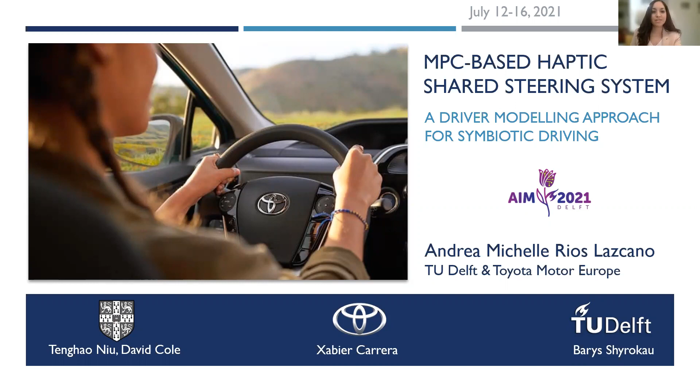We will start with an introduction of the current situation of vehicle control. Afterwards, I will recap the two main pillars of this new assist system, which are driver modeling and model predictive control, combined within the haptic shared control framework. Later, the results of the driving simulator experiments will be presented, and finally, the main conclusions and future steps are outlined.

Let's start with some background regarding the automotive sector. The different projections towards the deployment of fully autonomous vehicles predict several decades of progressive increase of automation until self-driving cars become widespread. Until then, automobiles with partial level of automation provide intermediate scenarios from basic driving aids to effective shared control between man and machine.

In particular, in haptic shared control, the driving task is performed simultaneously by the user and the controller, combining the best qualities of each of them. In addition, in this strategy, continuous collaboration is present through the exchange of feedback. And this is why we consider haptic shared control to be the most suitable approach.

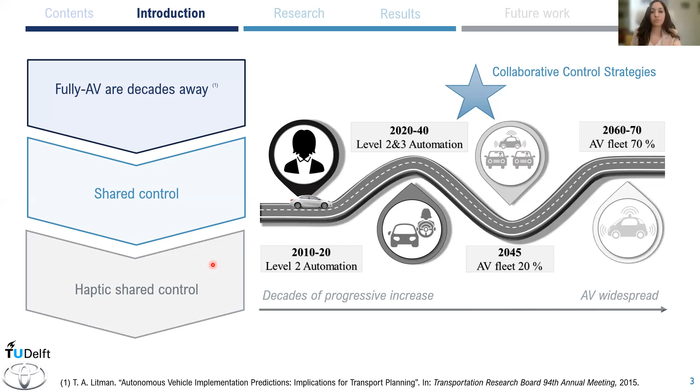Now, the big picture is advanced driver assistance systems are meant to increase comfort and safety while driving, but they often perform badly because they tend to prioritize an unnatural path tracking performance because they do not consider the human factor due to this complexity.

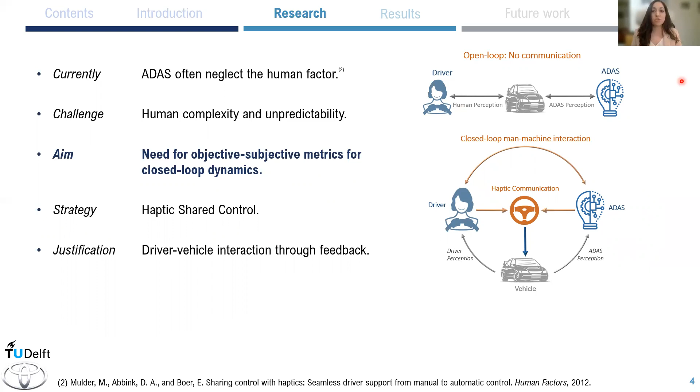But this change of concept is fundamental in order to increase user acceptance. Therefore, intelligent systems must take into account the closed-loop human-machine interaction in order to develop collaborative controllers.

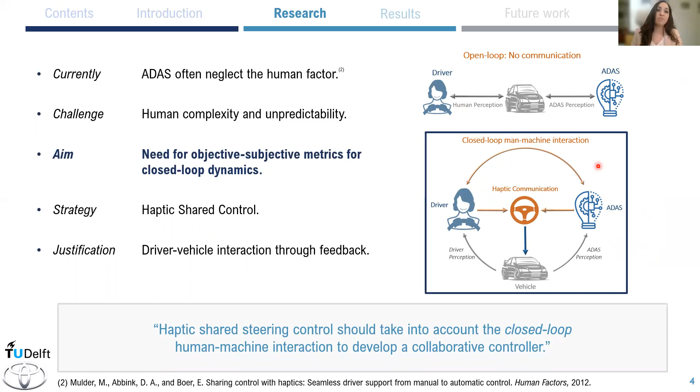Therefore, a novel concept of the proposed controller is that it contains an extensive driver model. First of all, driver modeling allows for a subjective-objective interpretation of steering feel. Secondly, we can use it to understand the closed-loop interaction, for which we define the sensory organs, the cognitive behavior, and the neuromuscular dynamics in the next slides. And with this driver model, we aim to realistically illustrate the human behavior.

First, the cognitive model. Although haptic shared control can lead to less steering activity and increased safety, drivers sometimes resist the assist system due to, for instance, different driving control strategies. Therefore, a good model becomes essential in order to reduce the intrusiveness of current ADAS.

The central nervous system is composed by the brain and the spinal cord, and its main function is to send control signals to the NMS. These commands, alpha and gamma, are calculated through a control strategy, the LQR, based on the desired states XKF. This is combined with a Kalman filter used to reduce noise coming from the brain and the sensory organs.

And at the same time, this requires an accurate internal mental model, which is a virtual representation that the driver has of their own dynamics interacting with the steering vehicle plant and the controller. And this image can be varied in complexity to capture different levels of driving skill.

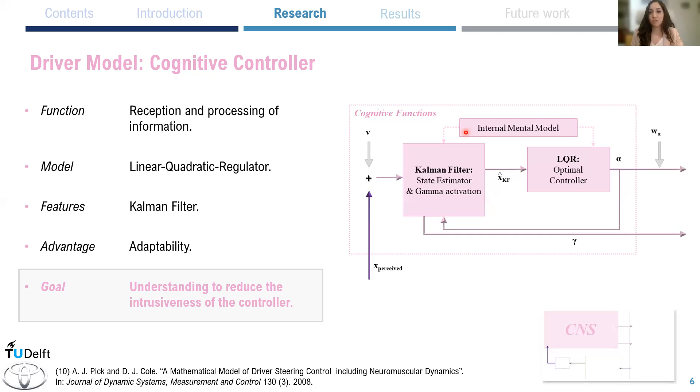Moreover, the use of haptic shared control allows for the exploitation of the NMS, which is highly adaptive and fast. This is why a detailed representation of the muscle dynamics is essential.

The NMS is composed by the reflex action of the muscle spindles and a linearized Hill muscle model, including the activation dynamics. These elements are required to model the coactivation mechanism, and this coactivation is affected both consciously by alpha signals coming from the brain and unconsciously by alpha R signals.

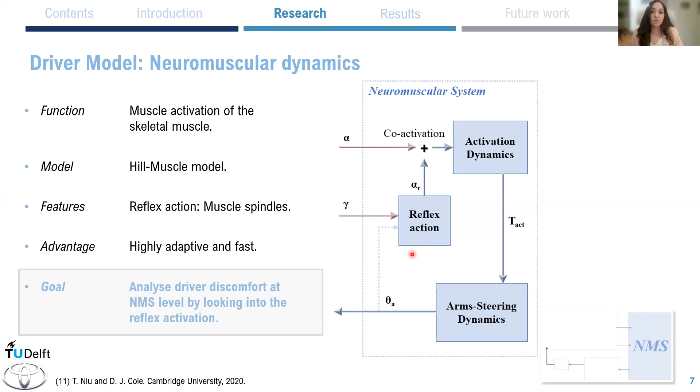The latter is associated with gamma signals, which can be linked to an inaccurate internal mental model or the rejection of disturbances, which may be perceived negatively by the driver. Therefore, the reflex loop allows us to link driver acceptance to the neuromuscular point of view.

We have just looked deeper into the cognitive and neuromuscular system. Lastly, the steering vehicle plant can be varied in complexity, and the sensory organs, such as visual or proprioceptive, characterize the driver limitations in the perception. Now, we have all the elements of a complete driver model.

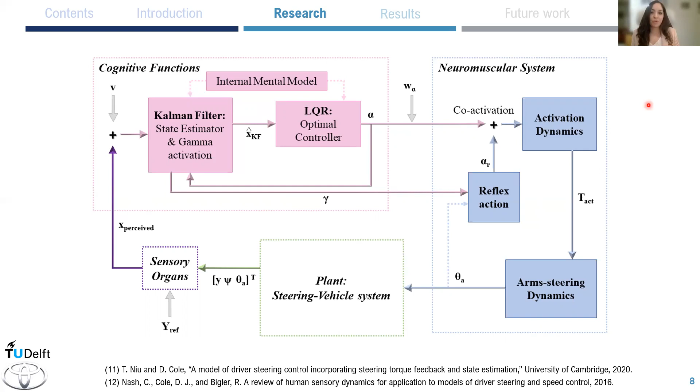The second key element is the controller. We calculate the optimal human-like assist through model predictive control. And with this strategy, we can predict the behavior in the future of the car, but also the driver, in order to optimize the provided feedback guidance and reduce conflicts with the driver.

And this optimization is performed within a finite time window or prediction horizon, NP, and this problem is iteratively solved to minimize a cost function subject to constraints.

Feedback control is introduced by applying only the first element of the calculated control input sequence, u(k). And this approach makes the model robust against disturbances. Moreover, it can be implemented in real time, making it possible to integrate the advanced driver model in the loop.

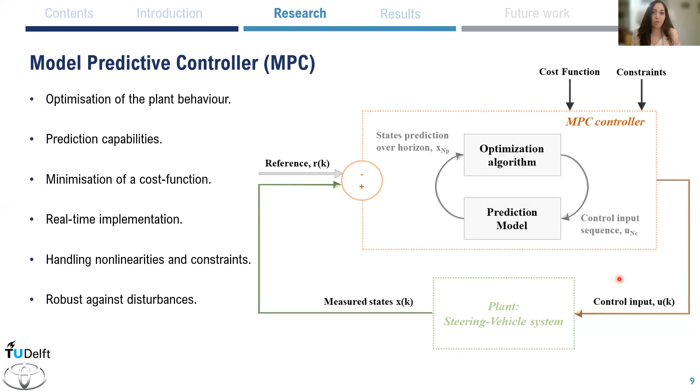This is done through a cost function that minimizes the tracking error and fosters collaboration. Driver discomfort is also tackled through minimization of the muscle spindle torque. But these two objectives can be competing: performance versus driver comfort.

So we design a dynamic objective that better adapts to the different driver needs. The adaptive level of authority is a feature that most research fails to design in a natural way, but with this approach we can truly design a shared control system.

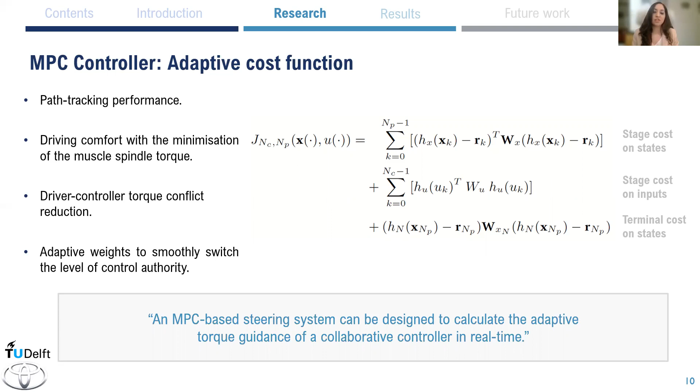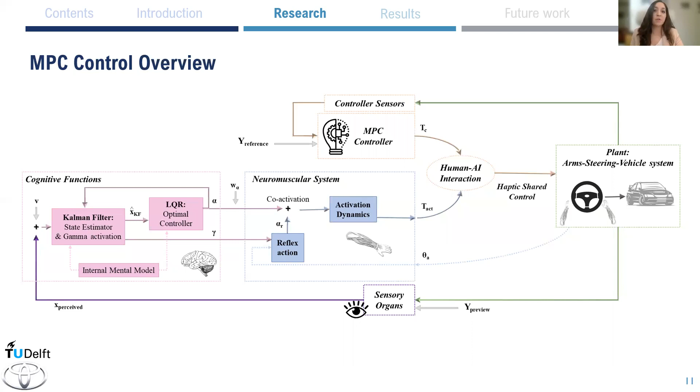As you can see, the model has a high level of complexity, but in short, an advanced driver model was integrated into the assist system with the aim to represent human behavior and predict subjective assessment of the feedback torque within our haptic control framework.

Now, we have performed experiments in a driving simulator to assess the performance, collaborative behavior, and subjective acceptance of the proposed controllers against a commercial benchmark, both objectively and subjectively.

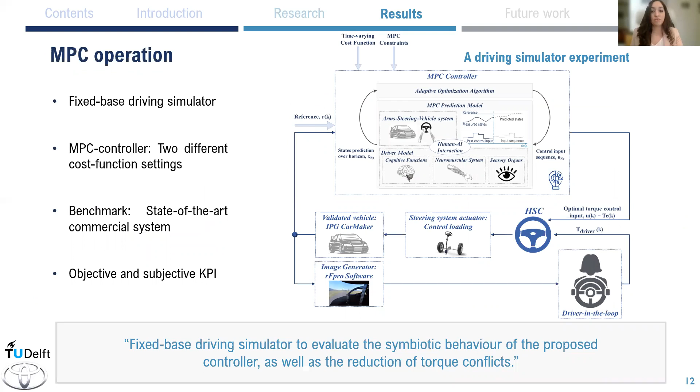All three controllers provide feedback torque to the driver to track the center of the path. In the figure, you can see an overview of the driving simulator setup, with the human in the loop interacting with the controller.

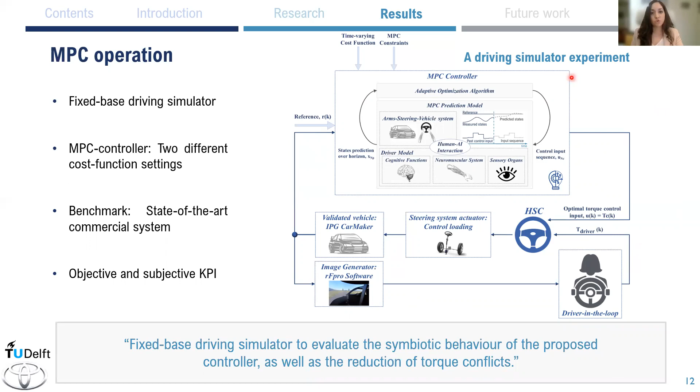The driving simulator scenario consisted of a 5-kilometer long road with straight and sinusoidal segments in order to ensure repeatability of the maneuvers. Moreover, the only task of the driver was to control the lateral motion of the vehicle, with the speed set to 100 kilometers per hour by an ACC.

Finally, the lane width was set to 5 meters and no lane markings were present in order to assess the behavior of the proposed controller subject to inter-driver variability and different human perceptions.

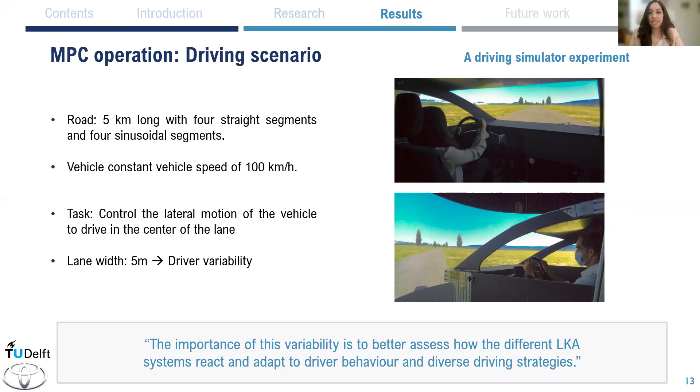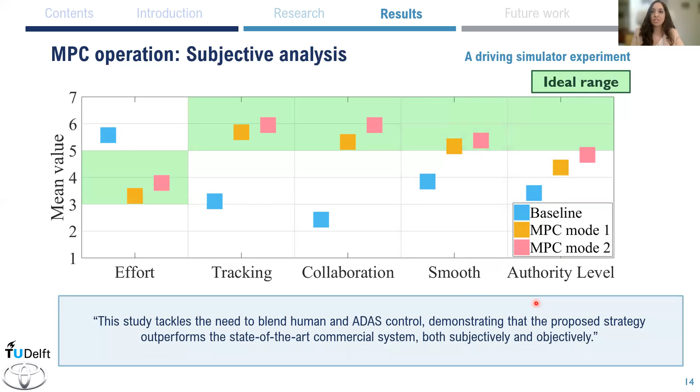This last one is graded lower in general because the level of control authority is partially given to the assist system, but this is not necessarily seen as negative as long as the assist is collaborative.

In general, the presence of driver-assist conflicts can make the perception of the controller being heavier than desired, as well as having a lower collaborative behavior in the case of the baseline.

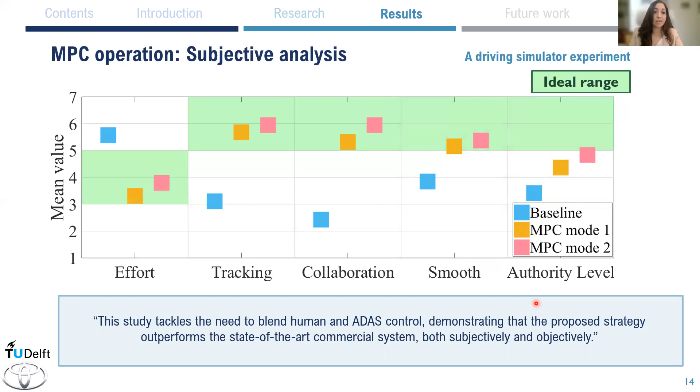We can also see from recorded simulator data that the MPC is in phase with the driver inputs. So the MPC controller actively cooperates with the driver and minimizes conflicts, which results in improved path tracking performance. In the case of the baseline, some of the torque conflicts may result in a more intrusive guidance.

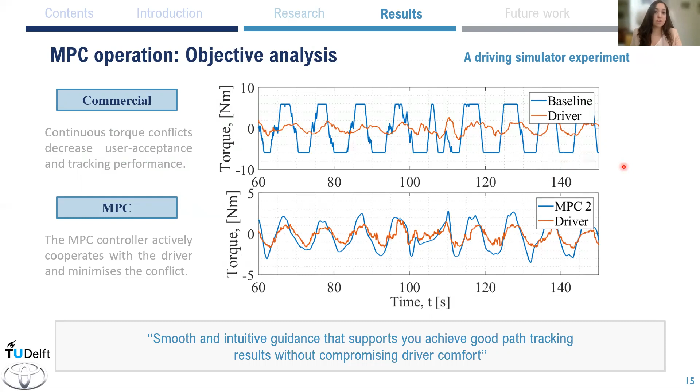Now, objectively, the tracking performance is assessed based on the RMSE of the lateral error, where there is an improvement of about 35%. And objectively, the collaborative behavior of the MPC controller in mode 2 increases by 60% with respect to the baseline.

In other words, the intuitive continuous guidance of the MPC modes make an efficient use of the torque feedback in order to achieve a better symbiosis with the driver.

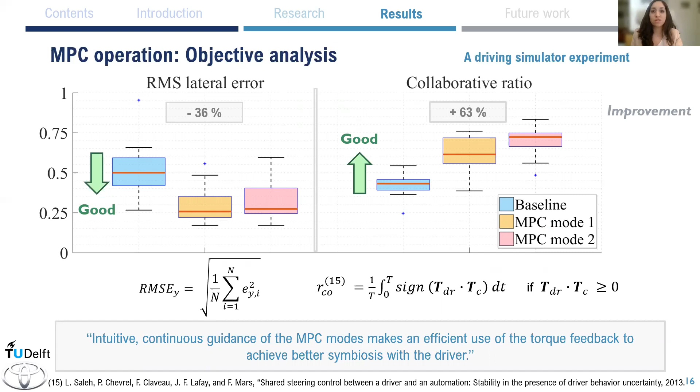Moreover, the proposed MPC controller significantly decreased the overall driver steering effort and level of being in control and level of control authority by 50%, in agreement with the subjective evaluation.

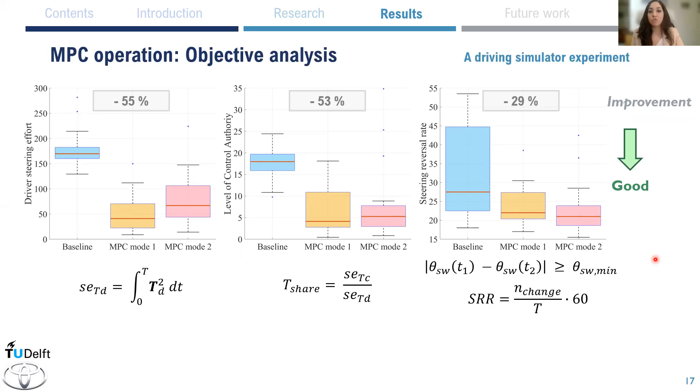Lastly, for the steering reversal rates, which is a measure of the workload of the driver and the smoothness of the control, the average improvement is about 30%.

To conclude, we have presented an optimal torque control law to foster haptic guidance, continuous cooperation, and the reduction of conflicts between the driver and the proposed controller.

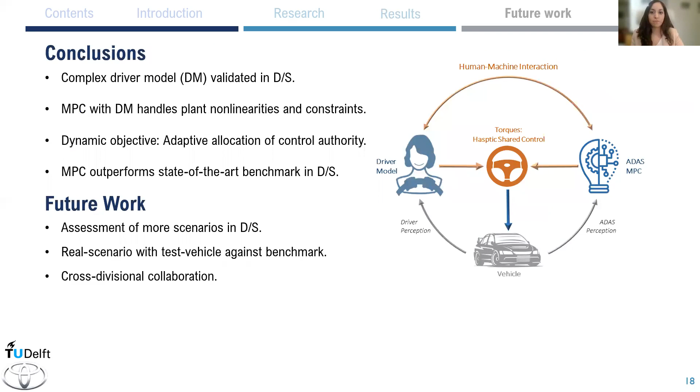For this purpose, an MPC controller integrates an advanced driver model, which plays an essential role. The predictive driver behavior enables the MPC to provide a pleasant driver experience by keeping smooth driver-in-the-loop dynamics. Moreover, the MPC controller allows for dynamic allocation of the control authority, which fosters symbiotic driving.

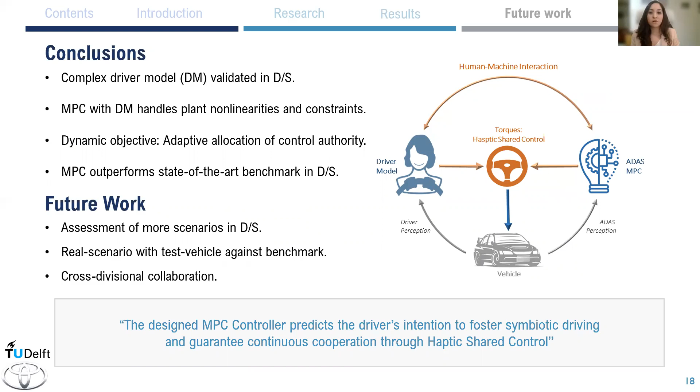Future work involves testing the controller in different scenarios, as well as evaluating it in a test vehicle.

With this project, my aim is to contribute to the development of human-centric ADAS. Thank you.